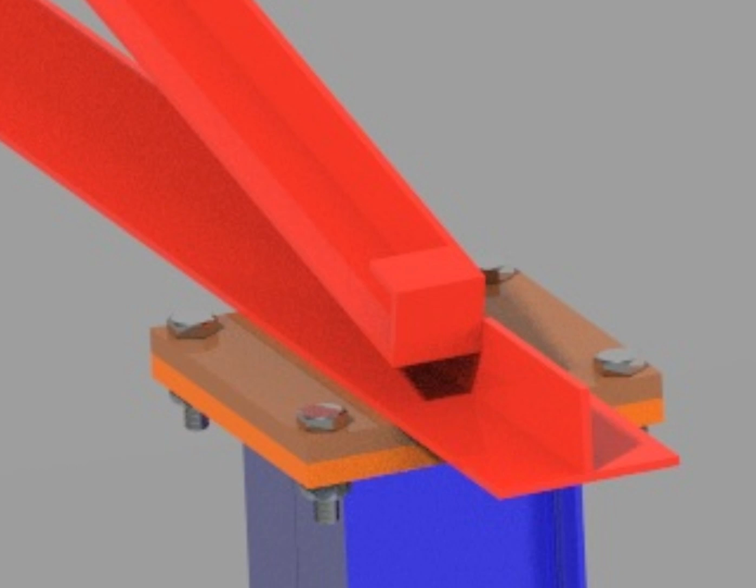Welcome to our channel. PTC Creo is a comprehensive 3D software, and I will be learning it step by step.

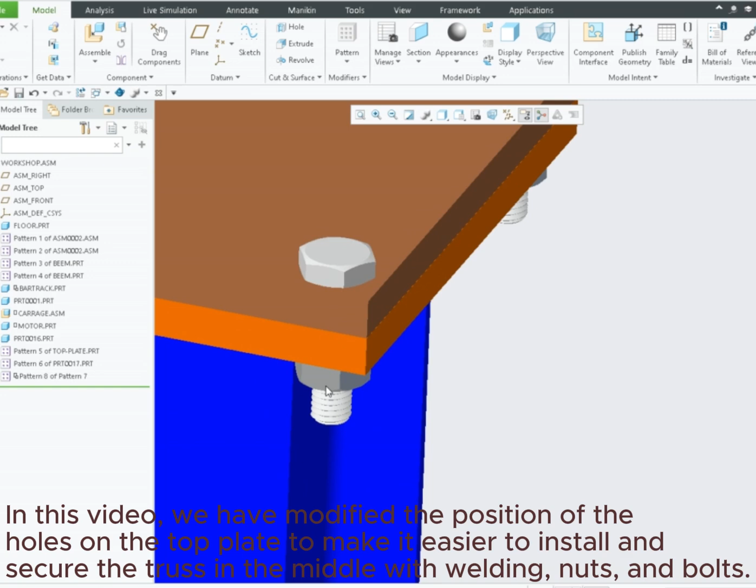Please watch the full video. In this video, we have modified the position of the holes on the top plate to make it easier to install and secure the truss in the middle with welding, nuts, and bolts.

Additionally, we have assembled all the nuts and bolts in this video and will upload a short video of this assembly soon. A sensor body has been installed on the front side of the crane to set its maximum range.

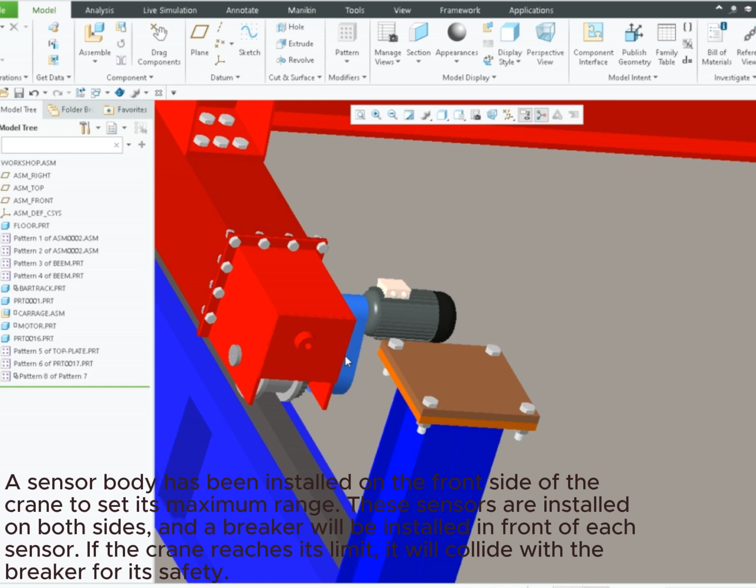These sensors are installed on both sides, and a breaker will be installed in front of each sensor. If the crane reaches its limit, it will collide with the breaker for its safety.

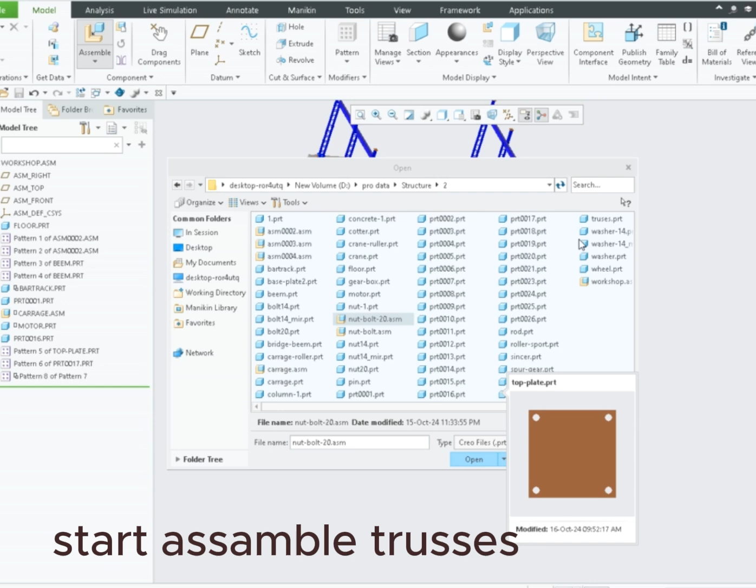Start assembling trusses. Go to the directory, select truss, and assemble.

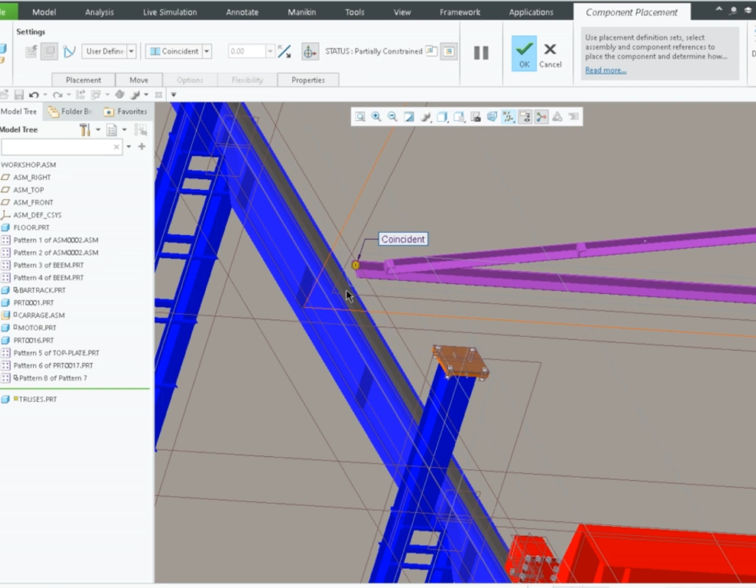We permanently weld it in the middle of the top plate, and the load will be equally applied on the pillar.

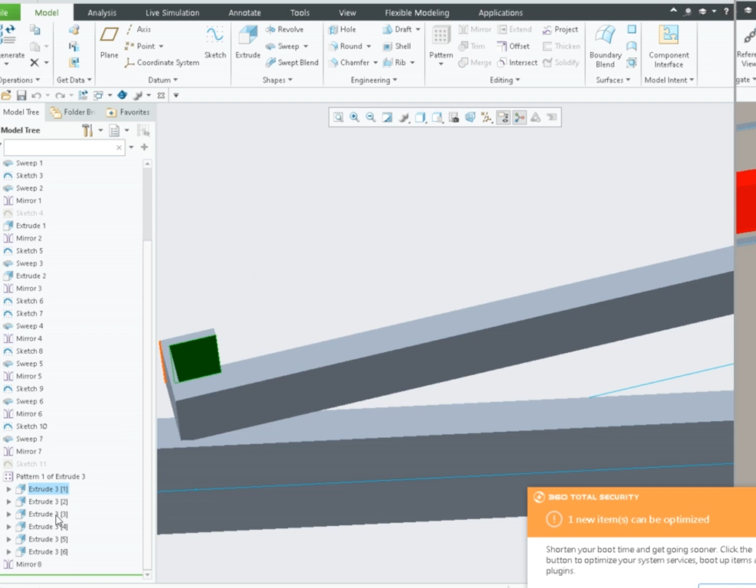In this video, you'll learn how to design a simple structure using PTC Creo 2024, perfect for beginners looking to start their journey in 3D modeling.

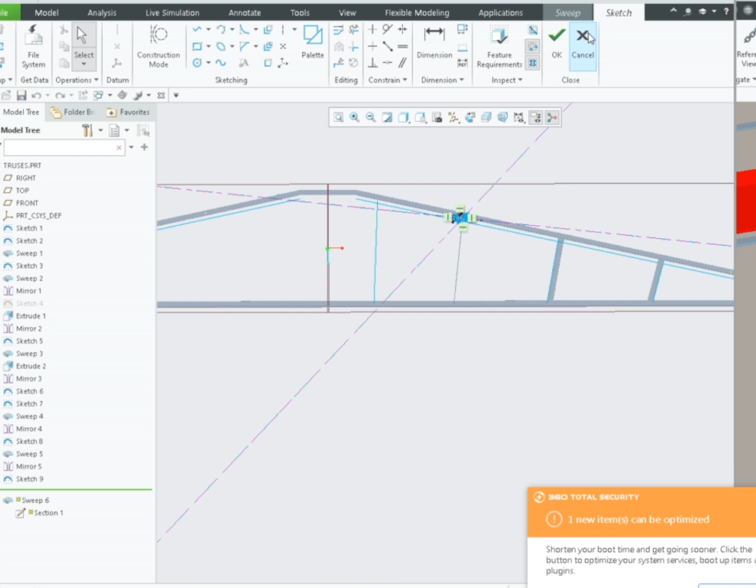I believe that we have made significant progress. Initially, I thought that if my audience could see the work, it might be useful to society.

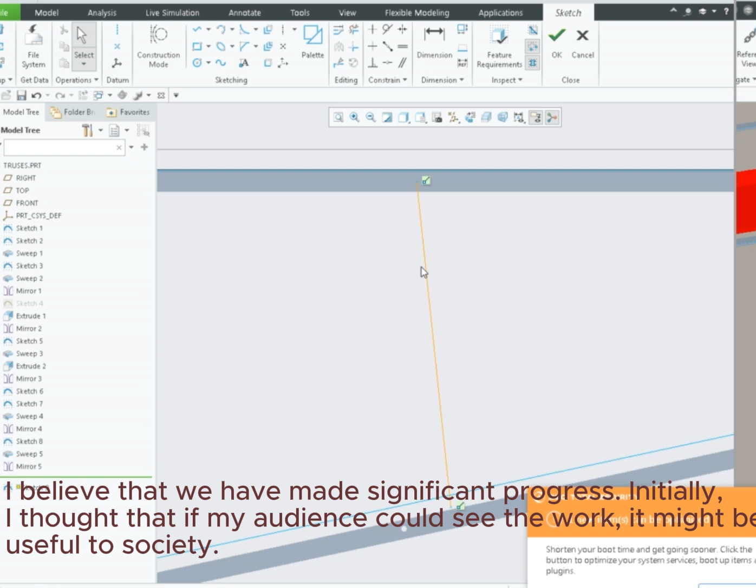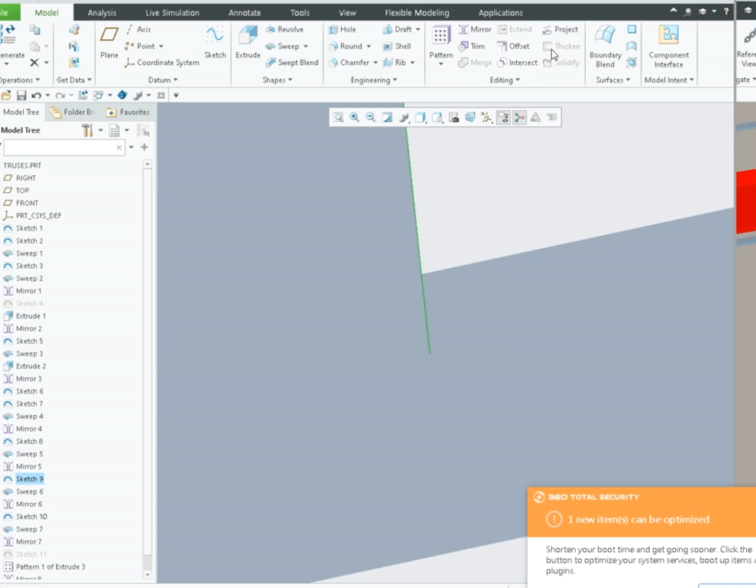We'll walk through the essential steps of creating a structure in PTC Creo, including sketching, extruding, and assembling components, while highlighting key features and tips.

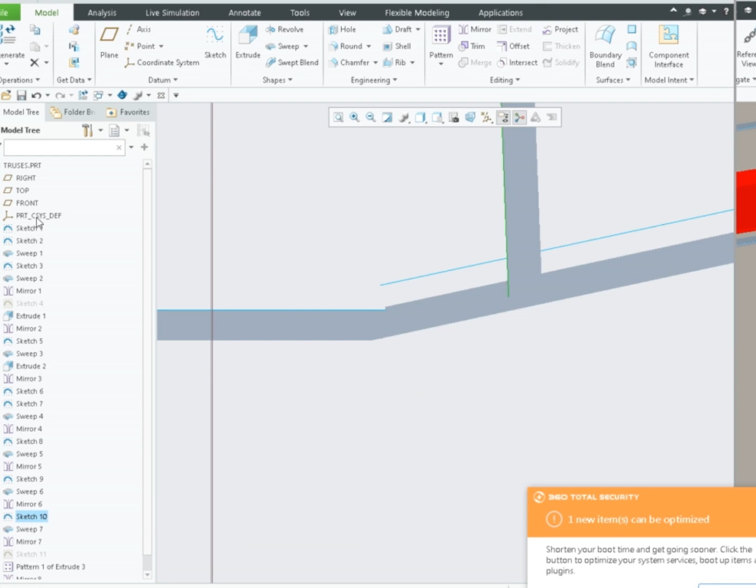The exciting part comes when you see your design come to life on the screen, showcasing the final structure and the techniques used to achieve it.

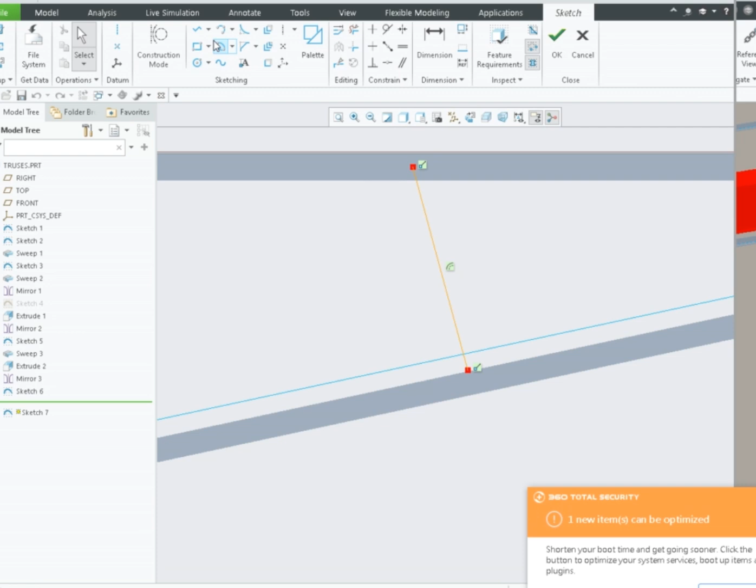We've covered the basics of designing in PTC Creo 2024, emphasizing the importance of practice and experimentation to improve your skills.